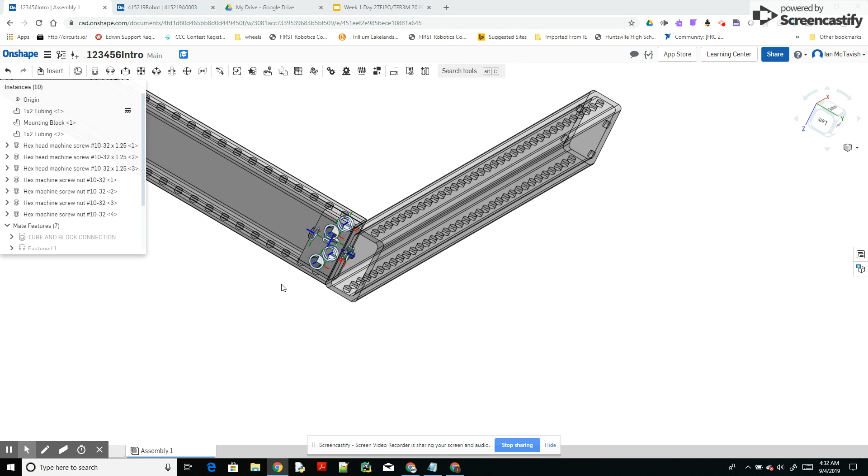I've got bolts. You can see I've got all these little mate connectors that are a little confusing, so I can actually right-click on... whoops, not what I wanted to do. But I can right click on different things and I can show different things.

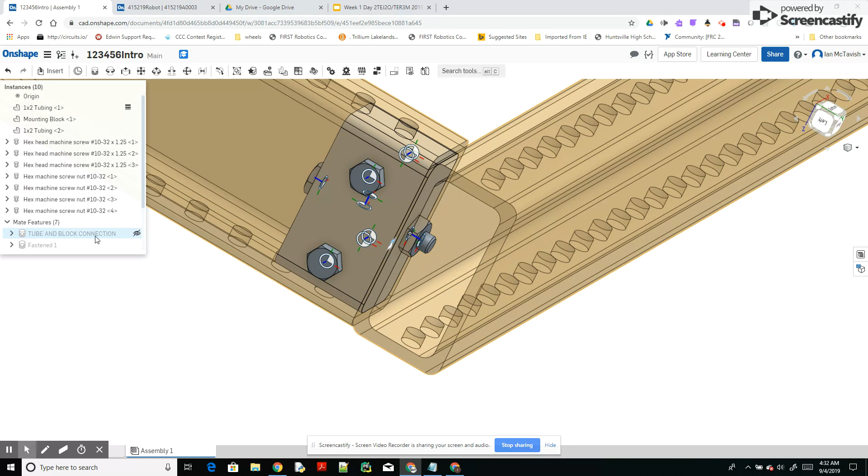So what I can do is, there's all the mates, and I'm trying to zoom in so I can select the actual mate, hide all mate connectors, and I can make things look pretty.

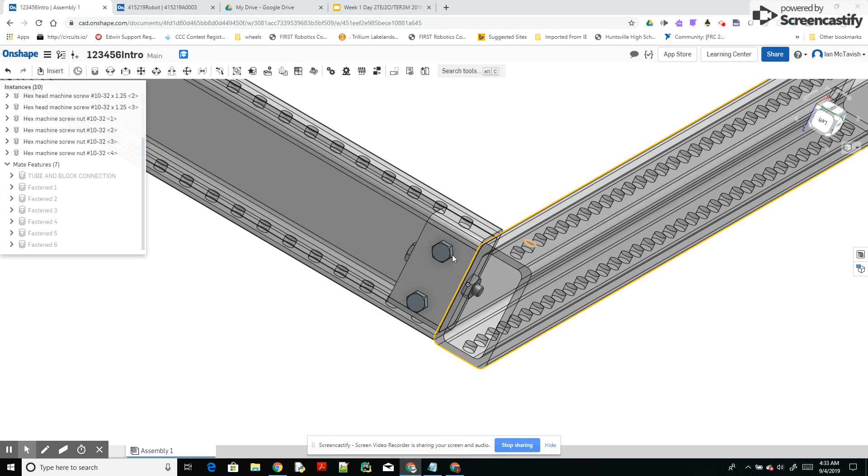And you can see I've thought about how this would connect. So I would bolt the mounting block to this tubing first, and then I would slide it through and bolt it through. I've added my nuts.

So over on the right here, there's a little thing called the BOM table, the BOM. This is short for Bill of Materials, and it allows me to have a list of all the different items in here. So first thing I'm going to do is add a column, and add the name for everything.

And I'm just going to take that column and move it left. And you can see here I've got my hex head machine screw.

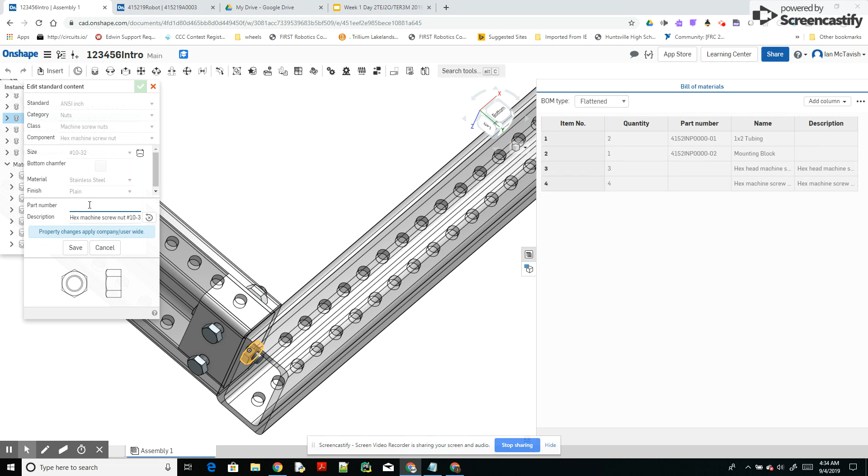I don't have the part number, so I would need to go through and let's see. I can edit the information, and I can edit the part number, and I would go to a website like Fastenal, find the part number, and add it in there, so that way I know I can go to Fastenal's website and I can quickly find the actual part. And it's obvious that it's something that I got to go buy, so it's separate. I would add things in the description to go Fastenal or something so I know where to buy everything.